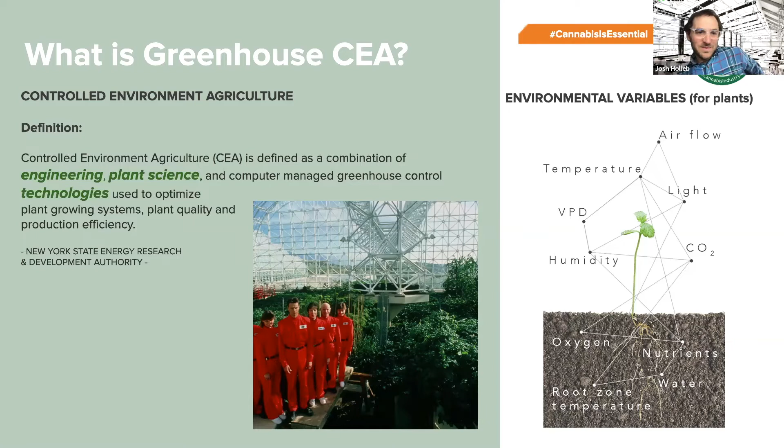So as Josh said, plants are at the core of this industry, right? No matter why you're here, what your background is, you're somehow working with or near the cannabis plant, right? It's a part of your interests. And so we're going to begin by just doing a quick overview of the plant science component of CEA. This will probably take some of you back to high school biology for a moment, but I think it's always good to review the basics and make sure that we're all on the same page and build upon that.

So starting with a very molecular component of all of this is photosynthesis, which directly translates to plant growth. So imagine if I'm a plant, I literally am taking in carbon dioxide from the air around me. I mean, today I'm in outer space, so there's not a lot of carbon dioxide, but on a normal day on planet Earth, and water coming up through my roots, and combining that with photons from the sunlight or wherever the source of light is. And that, through the miracle of photosynthesis, converts to simple sugars, glucose, and oxygen.

And so this chemical reaction has been around for a very long time, and it's not changing. A big part of CEA is to understand this and recognize how you can control the variables that lead to photosynthesis. Because when a plant is photosynthesizing, it's growing, either in size or going into a flowering stage and producing product for the industry. So that's just a quick overview of the fundamental level of CEA, which is plant growth.

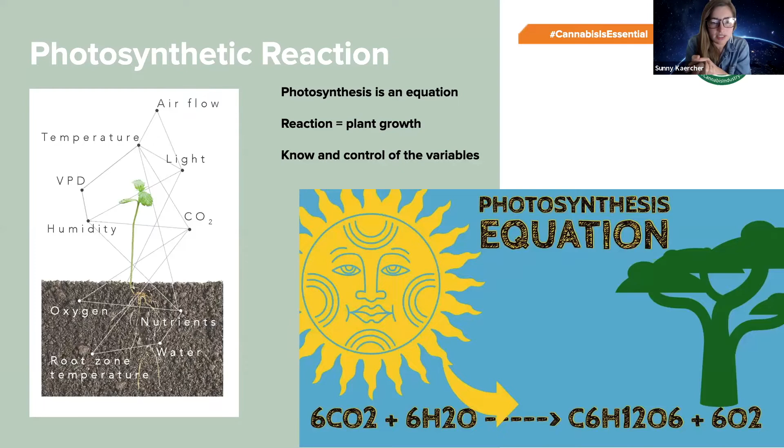So the first thing that we think about, of many, and we'll get into all of them, but the first thing that we're thinking about with cannabis production is light.

When we started in Colorado, which is where we're based, you could not grow in a greenhouse or outdoors. It was indoor cultivation only. And the industry was formed around that. That became the standard. It had been the standard before cannabis was legal to cultivate anyways.

Now we can use the sun. The sun obviously is the cheapest source of light for our plants. It has the spectrum that the plants want, or at least wanted. Some might argue they've been bred to use what they're used to now, but we would always say that still the sun is it. It has UV light. And so our goal, which is for highest quality, highest yield, lowest operating costs, is to utilize the sun as much as we possibly can.

We are looking at a lot of things when we're looking at light. I also want to say that this isn't only sun. When we design a proper cultivation facility, there is a full LED lighting system that can accommodate whatever the cultivator's minimum PPFD level is or DLI level that they want on a daily basis. So even on the shortest day in the middle of the winter with no sun, we can always hit that minimum light level.

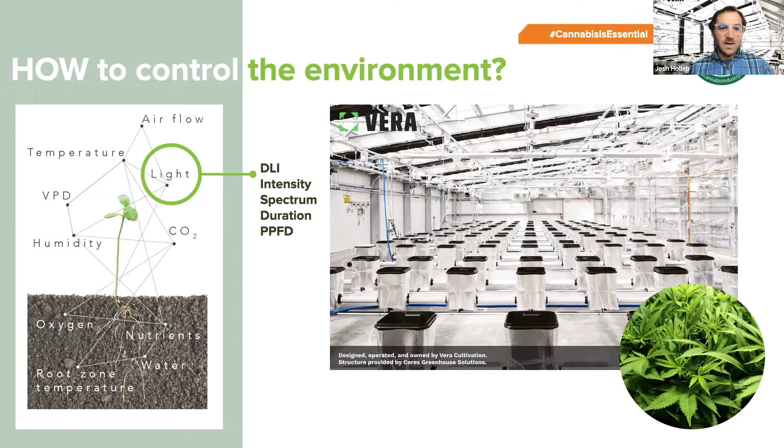The next thing, and probably other than sunlight, the most exciting thing for me personally is controlling the environment of the greenhouse. So now we're letting sunlight in. The greenhouse is warming. It's just something that happens with sunlight. Infrared light is coming in and the greenhouse is warming. Even on the coldest day, we're in Colorado, it could be 10 degrees outside Fahrenheit. It could be 0. We still need to cool the greenhouse.

The sun warms it. These are highly sealed, insulated greenhouses. We need to cool the greenhouse. And there are also times when it's gray and we have to heat the greenhouses. So how do we do it? And how do we do it efficiently and effectively? We base our controls on vapor pressure deficit. Some people know what this is, some don't. Vapor pressure deficit is the ratio of temperature to humidity that actually creates a pressure in kilopascals that allows the plants the optimum conditions to uptake nutrients and transpire.

So basically what we're trying to create is an ideal environment for the plants to move the nutrients that you're trying to feed them so that they grow faster, so that they have higher quality flower, and then we try and do it in the most efficient way possible. So traditionally in an indoor greenhouse, we're trying to be at 75 degrees Fahrenheit, 50% humidity or something like that, and we want to lock it down.

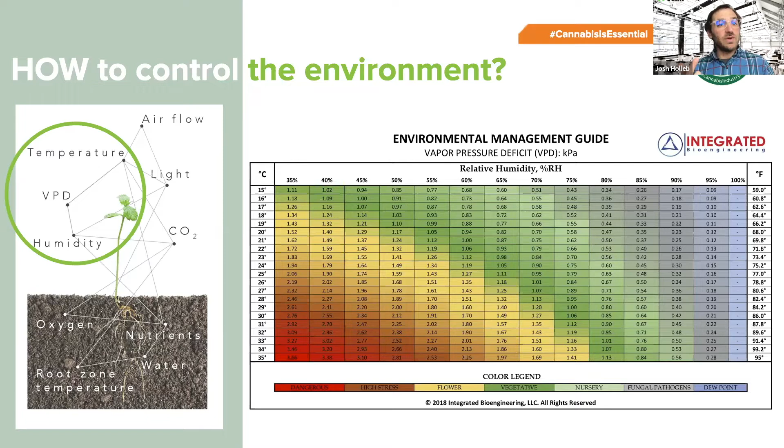All right, so going underground, which I find one of the more exciting components of CEA, but really it's all about how it ties together. It's not any one component or variable here. So nutrients and water, also essential to plant growth. If you have everything above ground perfect, you have that perfect VPD, the perfect PPFD, your plant still is not going to grow if it doesn't have water or the right amount of nutrients for that given time. And so, like we've been saying, it's a balance of all these different variables to lead to plant health.

There's no one right way to set your nutrients or your watering schedule in any cultivation. The first thing you want to look at is, what is your grow style and what makes sense? Are you growing in soil, hydroponics, aeroponics, or some combination of those? And a good way that I like to tell people to make that decision is actually looking outside of the facility and seeing what you have available on site.

Are you in an area where you don't have a lot of water, perhaps in Arizona, Nevada, et cetera, where it makes sense to choose a grow style that's going to be light on your water usage, such as aeroponics or hydroponics, or a very different climate. Say you're in Michigan and you have plenty of water, but not as much sunlight, or you're in a more rural area and access to power through the utility is actually the limiting factor. So these are some of the approaches to making a decision about what grow style will make the most sense for your cultivation.

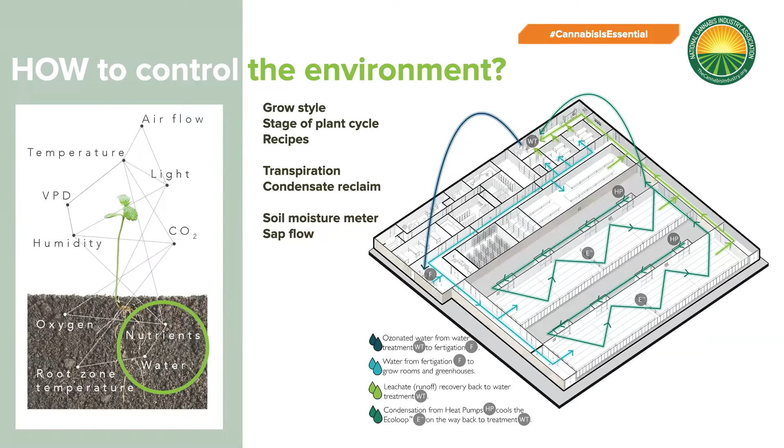I'll hand it off to the next slide. And just so you know, Sunny, your audio seems to have corrected itself. It might have just been a bandwidth issue on my end. So sorry for the distractions. Good. Hope everyone could hear me. Perfect. All right.

So the next thing in the environment is airflow and CO2. Traditionally, any grow room is going to have some sort of air circulation, whether it's oscillating fans moving air and creating a gentle breeze on the plants, or in a greenhouse, horizontal airflow fans. In our greenhouses, we're putting our heat and cool in through the north wall of the greenhouse, all of it, and then we use a fan to circulate the air. It's fairly standard. A newer technology that's being used, we use it, most do, is a destratification fan.

So in a greenhouse especially, because there's sunlight during the day and potentially cold temps at night, where the roof is actually much colder than you would ever see in an indoor cultivation room, the air will stratify. So heat obviously rises, which means you could have a cool zone in your plants, and our focus is the plant zone. We don't really care what's happening up top. Destrat fans blow directly down.

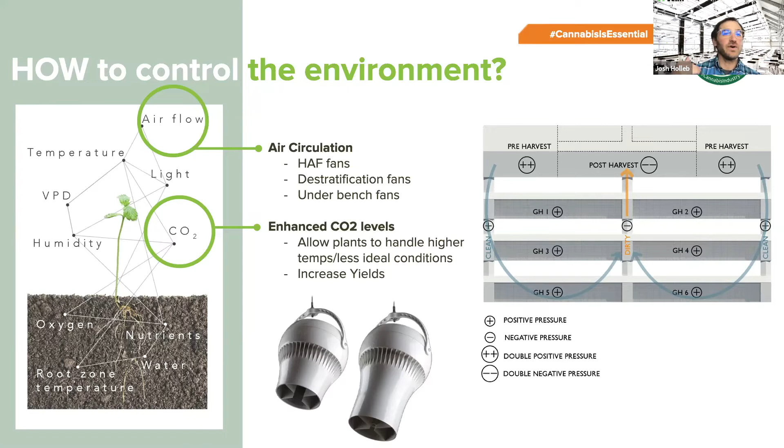That's consistent for your plants. That means you're not wasting any CO2. You're being very precise with it, which is part of our goal: getting the plants what they need in the most efficient way possible. So, we've really gone deep into a lot of these variables here. Now we're going to transition a little bit into how they relate to each other and how we are really making the CEA come to life.

So ecology, first of all, is the study of relationships. In biology, you're studying life; in chemistry, you're studying compounds; and in ecology, you're studying the relationships. And that is a lot of what we're doing at Ceres and what happens in CEA: when you fiddle with one variable, how is that going to affect all of the others? And you can really get into the fun stuff when you change two variables and see how that affects plant health. And so the overall goal is really to optimize performance and plant health.

And so some examples of how we could do this in the greenhouse facility is using light fixtures as a heat source. So this would be really with HPS lights, not LEDs, but that...

Am I still on here? Yeah, you're good. I was just getting the screen share reoriented. Sorry about that, Sunny. Okay, sorry.

So, if you chose to use HPS lights in your cultivation, they also have a high BTU heat output. And so that would be considered in sizing HVAC systems, looking at lighting schedules of when those lights are on and when you will be heating the facility.

So a second example would be to use fogging as stage 1 cooling. I think that we think a lot about dehumidification in grow environments, but humidification is also real. If the environment is too dry, then the plants are not going to be growing to their optimum health. And so we can use fogging as stage 1 cooling as well as a way to increase the humidification. So the point of this example is that certain systems can be used for multiple purposes, not just one.

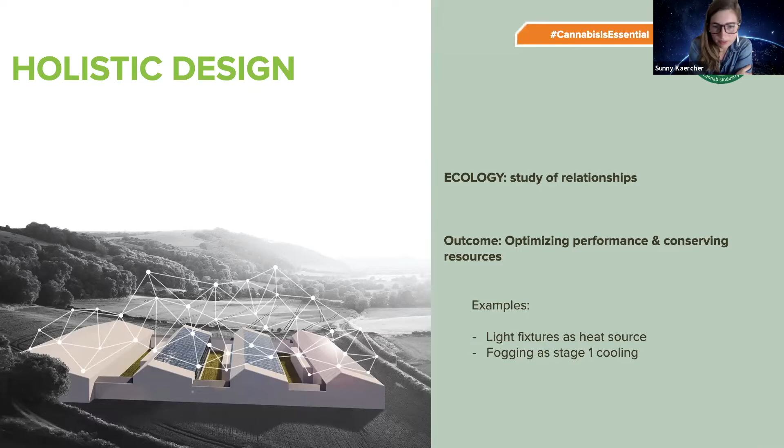So next slide, and we'll talk a little bit about how we can control them. So what we're doing here is just going through what controls have looked like over the years. While I've never used it, I'm sure that some people used to plug in or turn on their lights at 7 in the morning and turn them off at 7 in the evening.

Early on, we were all using timers to control our lights. Usually, I know in my case, I was there to make sure the lights were on in the morning and off in the evening, because the $20 timer had a pretty critical role in my overall grow.

We've evolved somewhat into light sensors, where now we can see what's going on with lights. We can tell the spectrum, we can see how powerful the lights are. We know that when the sun's out, our light reader tops out at 2200 ppfd. In the greenhouse I'm in right now, on almost any sunny day for most of the year, we'll max out at least in the middle of the day, if not most of the day, at that ppfd level. I can't see how high it actually is because my reader doesn't go that high.

The next stage, which is what Sunny was just talking about, is smart integrated control. The idea is that all systems are talking to each other through one channel to optimize the grow and make it as efficient as possible, while still providing all the set points you're after. It gives us the ability to be quite precise while being very efficient.

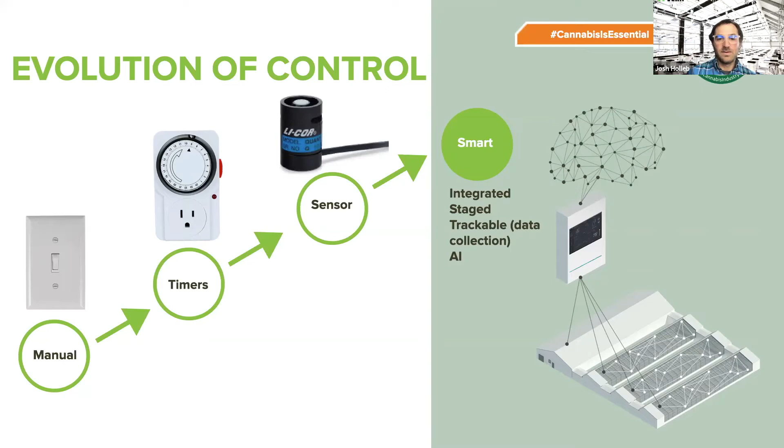All right, so you're probably thinking, this is a no-brainer. This is amazing, how do I do this? So let's talk a little bit about how we actually go through the design process for creating a sealed greenhouse facility and using CEA.

Time is a major component for our approach to design. And I'm not just talking about speed, like how fast can I make this happen, but being able to look back at market and industry trends, as well as making educated assumptions about what is coming.

One perspective is, what kind of product do I want to grow? Am I growing a plant for high grade flower, or for the edibles market, or for extraction? Knowing your market based on location and the maturity per state or region, and knowing your consumers and customers, will really help determine that. These are the kind of conversations we're having before we even dive into designing the HVAC system — what's your vision, and how is it going to fit per place.

Other components too are looking at your employees and what the available labor force is like, what the skill set is, and the location of your build. If you're in a really rural area, there's a good chance you won't have a lot of a labor pool to choose from, so you might want to go more automated, versus if you're in a place where you have a team already trained that you want to put into this facility, maybe you already have all your SOPs in place. Zooming out on the bigger picture of how to make these decisions for your facility and to have success is part of the holistic design approach. This is a little bit beyond the scope of CEA, but it's very much relevant to the industry — talking about the people and the market and why you're doing what you're doing.

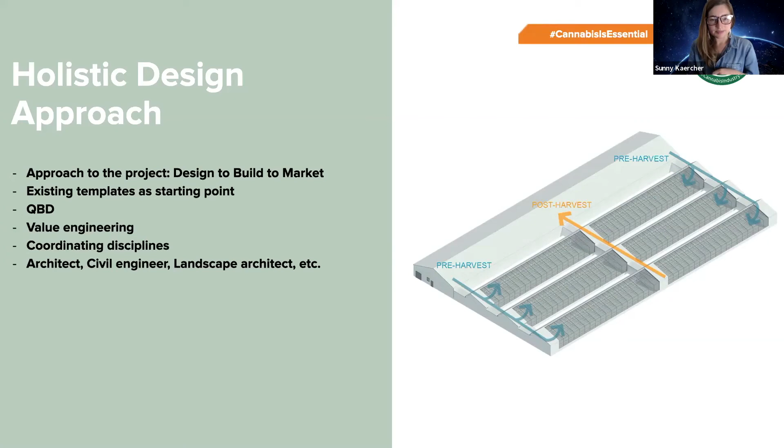It's not just one discipline, it's not just Ceres involved, but there's architects, civil engineers, maybe a landscape architect, etcetera. Identifying and bringing that team together from the beginning is really crucial to have a successful design process all the way through the building. You want your facility built properly and quickly, and then getting to market and making sure it's operating just as it was designed. All right, next slide.

Okay, and I believe our last slide is the business case for CEA.

So everything we've talked about is with the goal of having a viable business that makes you money, that is environmentally responsible, happy employees, happy plants. But there is a breakdown that when you look at this on paper, it needs to make sense as well. And we're asking for, when you build something like this, it's not a small investment upfront.

So my notes are a little funny here, but I'm going to start with energy efficiency rebates. What we're learning is that because this is such a holistic system, and because there's so much designed into it to reduce energy costs, that almost anywhere in the US that we build, and also we're learning in Canada as well, we are getting rebates from the power company, and they can be significant. So we do that work on our end because it helps us to sell greenhouses, but also it's really important aspect of what we're doing is to prove that our design is actually reducing the operating costs like we say it is.

When you build a facility like this, you're reducing the need for chemicals, which allows for easier sales, higher quality product, lower operating costs. Now that's in labor and in materials. You have to buy the fungicides, pesticides. And it also gives you a consistency where as a business owner, you know that you're always going to have the consistent product to sell. You're never worried that you're going to lose a crop like you have potentially been in the past. It gives you this peace of mind that we're dialed, and we're going to have a harvest.

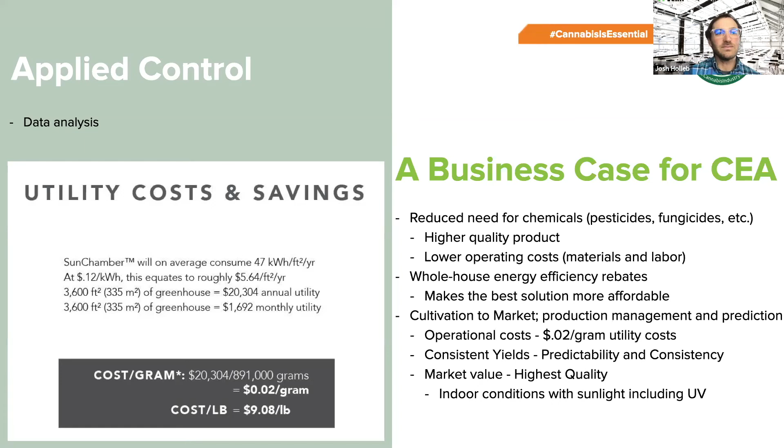In the end, for the grower, you're cranking out indoor conditions with full sunlight. You're getting the highest quality product on the market, with full UV, which is good for terpenes, cannabinoids. It's a mild stressor on the plants, which is beneficial. It also reduces pests. And we're seeing happy customers growing a lot of product at minimal inputs, which is the goal of this whole conversation. And with that, I think we can wrap it up and move into some questions.